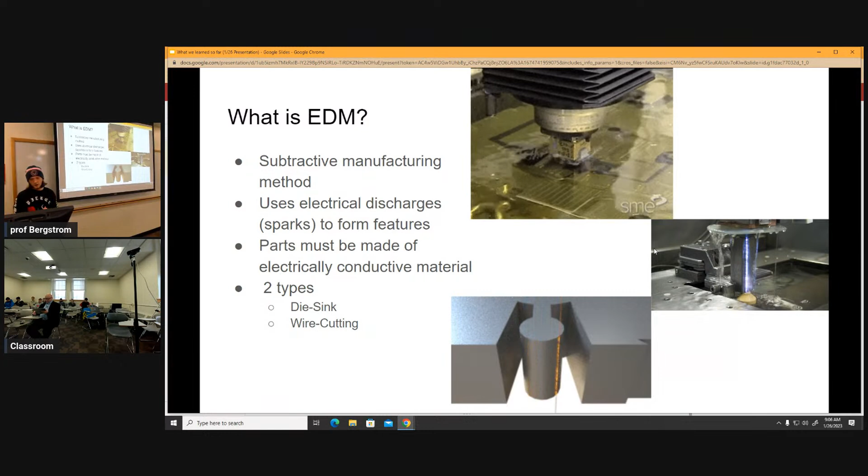And there's two types: there's die sink EDM and wire cutting EDM. Die sink is also known as conventional or sinker EDM, and it's done by removing material from the mold using a graphite electrode, and there's this dielectric fluid between the cathode and the workpiece, and it basically sparks as it's going over the piece, and it erodes the material as it's going by. Here's a little example of that.

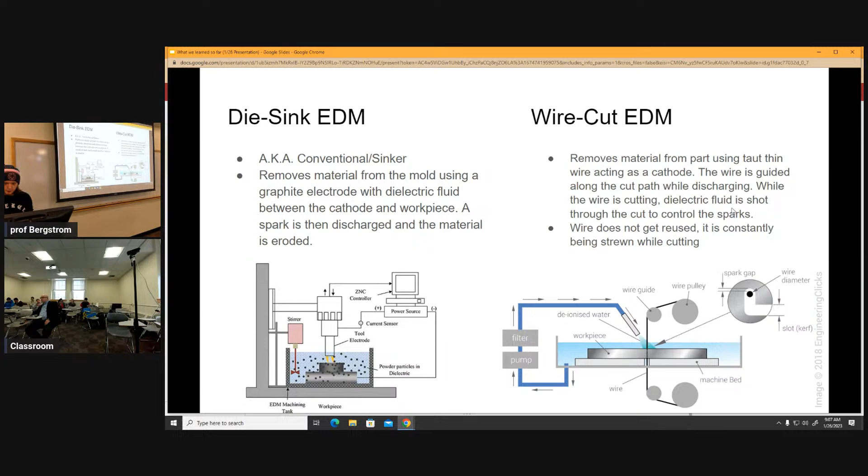And then wire cut EDM also removes the material using EDM, with a wire acting as a cathode, and it's this taut wire that, as you can see, goes up and down through the workpiece, and it's used to cut out the workpiece. The wire is guided along the cut path, and it cuts the piece. It also uses a dielectric fluid to keep these sparks extra precise, and the wire does not get reused.

All right, so I'm going to talk through a couple of pros and cons. Most of these are focused on wire EDM because that's where a lot of our actual machining is going to be for our actual part with the gear. But some pros is that you can cut pretty complex shapes or really small shapes. So part of cutting with a wire rather than conventional tooling is you're not dealing with having a tool with a radius or a specific way it cuts.

Presumably for a mill, you can't cut an inside sharp corner very easily because of the radius of the tool itself. Whereas with wire EDM, tiny tapered holes, gear teeth, hex bores, all those shapes we're capable of doing to a different level of precision, and tiny just because of the actual size of the cutting implement, the wire.

For us, the gear teeth are involute cut teeth, so it's a pretty complicated shape. Also cutting very hard materials - obviously they have to be conductive, as we mentioned, but we're going to be using steel. We're not going to have the same limitations for hardness that we would if trying to cut with an end mill. And maintaining very fine tolerances.

I have a GIF on the right that I think is kind of cool. If you look up examples of people using a wire EDM, there's a toy people make a lot where they do two complicated shapes that are really close to each other, so there's a nice running fit and they slide into each other. I think that's an illustrative example of how fine a tolerance you can get - two different parts can slip in smooth like butter.

Some actual cons: there's an inherent skill set needed for operation. We've already had a fairly steep learning curve just getting to the point of understanding what we're doing, safety, setting up CAM, etc. Because we're at a school, there are experts who work with these machines. But if you're using this in industry, bringing in a machinist who has only used conventional machining, there's still an inherent larger skill floor to get into.

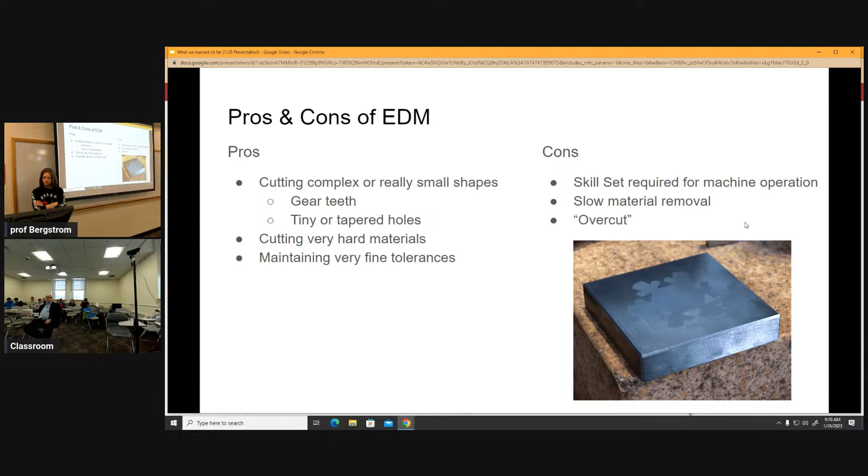Moving on to how EDM applies to our project: the machines we're using. We're going to start with the Haas mini mill, which most of us are familiar with or have used in ME1800. It has a pretty big travel distance, can hold a decent bit of weight, and cuts relatively quickly - you can see it moving pretty quickly when we've used it in the machine shop in Washburn.

The main purpose for using the mini mill is that we're going to be pre-cutting a hole so the EDM can then do the hex key in the center of our gear, and then we're going to be facing our stock so it looks good.

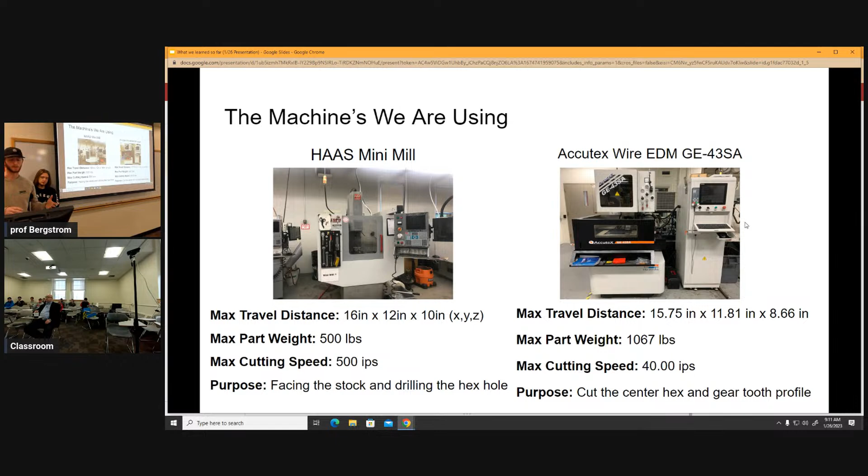Moving on to the actual EDM, as Justin and Sam mentioned earlier, we are really using the wire EDM, and it has lots of benefits, such as precision. It has about the same travel distance as our Haas mini mills and can hold a lot more weight, but as Sam mentioned, it moves at a much slower rate - around 40 inches per second as opposed to 500 inches per second on the mini mill. We're using our wire EDM to cut the center hex and our complex tooth profile to make sure we get that nice, precise cut.

There are 4 operations you're going to do. First, you want to face the surface, using either a mini mill, VMC, or whichever mill you want. Use a face mill to do both the top and bottom face so you have a nice surface finish and the right start distance, which should be 1/4 inch.

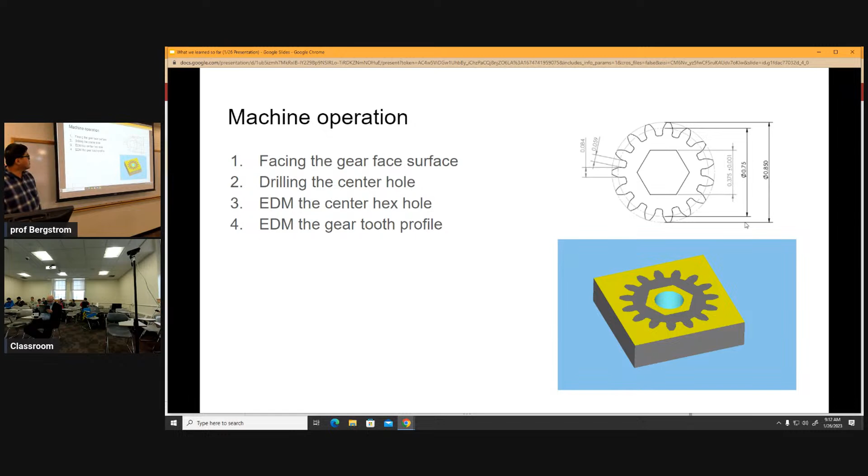Then you want to drill the center hole where the hex is. The EDM can cut the hex, but it cannot do the hole, so you need to drill the hole for the EDM before you put it in the machine. I set the hole to be 1/4 inch, but if you want to change it smaller that's fine. Then we use the EDM to do the inside of the hex, then switch to do the outside and cut the gear path. I'm not going to go into the mill process in this project since it should be quite simple.

So how do you use Esprit to do this EDM thing? First, you want to have your part and your stock imported into Esprit. There's also an Esprit template that will be provided for you. The one thing you need to make sure of is that the part and stock are sitting at the corner, not the center, as the origin. I made the bottom left the origin of the operation.

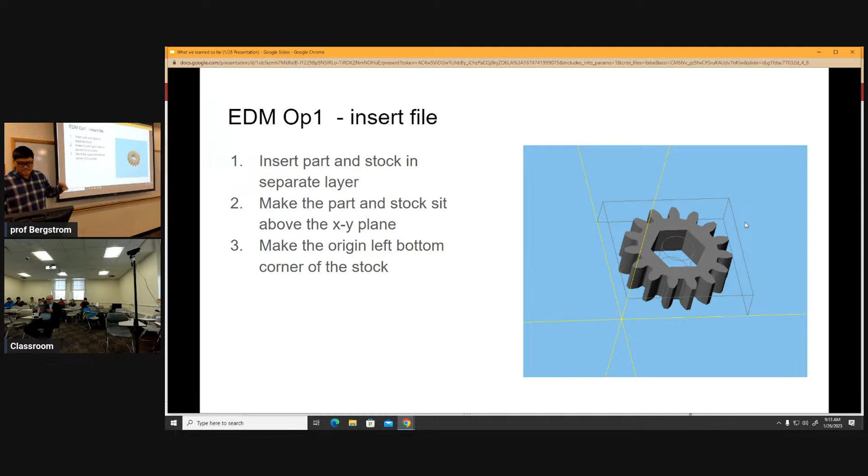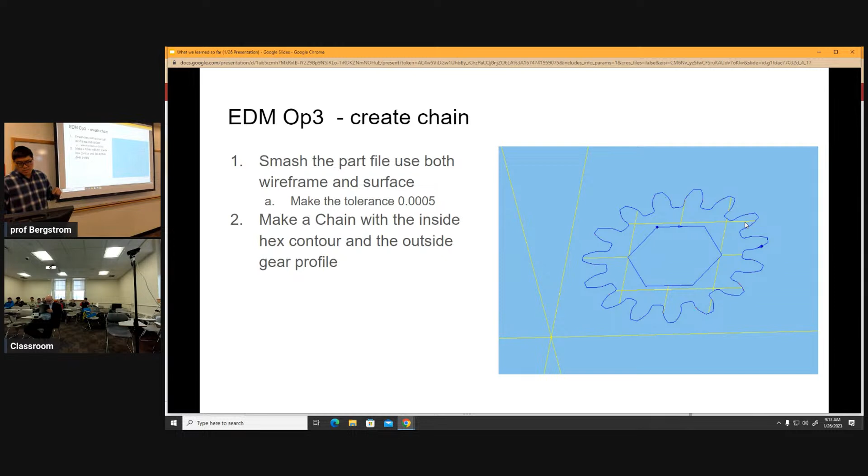Then you want to create a chain. You want to smash the part in Esprit, then make the tolerance about half of what we used to use. Then you make the chain of the inside and outside features on the XY plane.

Then you want to select the chain, then select solid wire gold, solid wire platinum in the Esprit section. You select contouring, then you need to set all the distances: upper wire guide, workpiece thickness, reference plane, lower wire guide. Since you're using wire EDM, you have two things that hold the wire, so you need to set what the upper holder is and the lower holder is. The machine also needs to know where your XY plane is, since that's where you do the operation, and how thick the workpiece is so it can touch your workpiece correctly.

One thing you need to know is that the outside profile is a punch and the inside is a die. That's just something to select in Esprit, otherwise it comes out wrong. Then in cut data, you need to select strategy and set E-pack to 1011, and set register to 1. In this setting, it's kind of like a laser cutter—you select how much power is going through and how many tool paths you're going to do.

In EDM, you can have a rough and a skim pass. The rough cut is just to cut the shape, while the skim is like a finishing cut to get a good surface finish. Then you need to set up the startup distance so you don't want the wire to be sparking—if the wire touches the piece and sparks, that grounds your wire and it doesn't work. You want the spark to happen before you enter wherever you want to cut. You also need to set the entrance and exit position so the wire knows when it's starting to do its wire EDM thing. That's it.

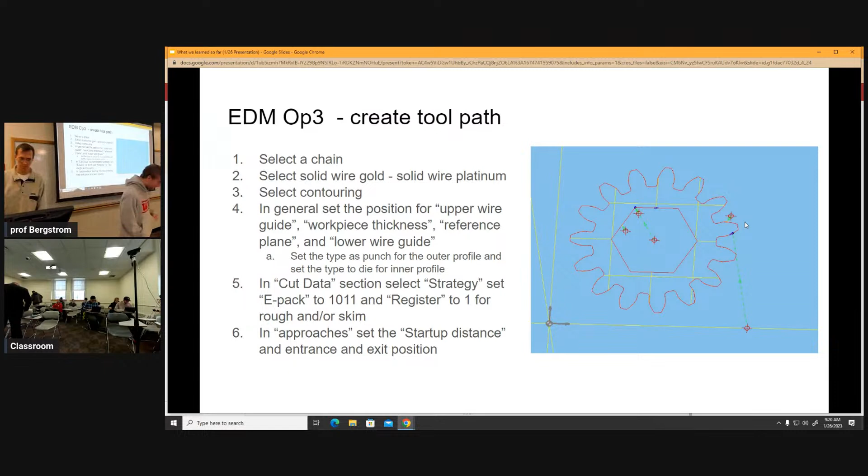You were several minutes into that presentation before I realized I was still listening to it also on YouTube with about a 4-second delay. It took me a few minutes to have that click in my mind. Go ahead, full screen.

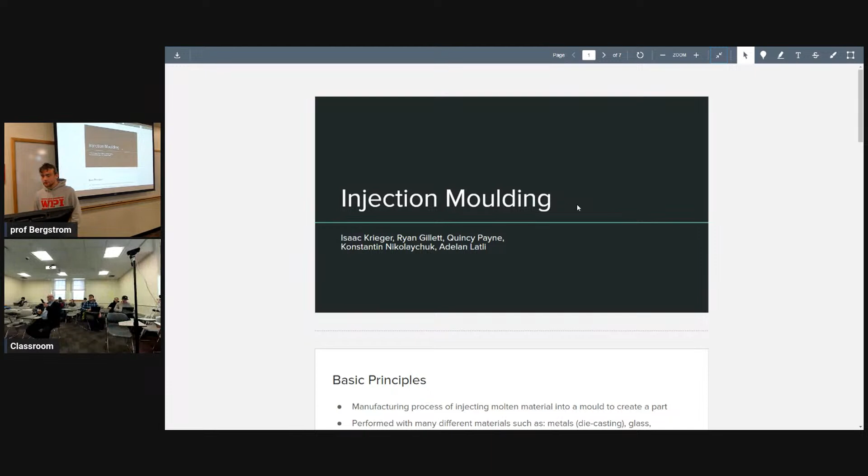So we had injection molding. We didn't get too much in the way of finding out what we needed for our machine because it was locked behind the door in Unity, but we did go and visit—you found it? We did find it, yes.

So what is injection molding? Injection molding is basically taking melted plastic and forcing it into a mold, where the plastic expands into the mold. You let it cool, take the mold apart, then you have your part. Some advantages: you can make pretty small, intricate parts, but it has difficulty with really small features and sharp corners. With more rounded parts, it has an easier time. You can also make parts pretty fast with injection molding, but it's not the most accurate way of making parts.

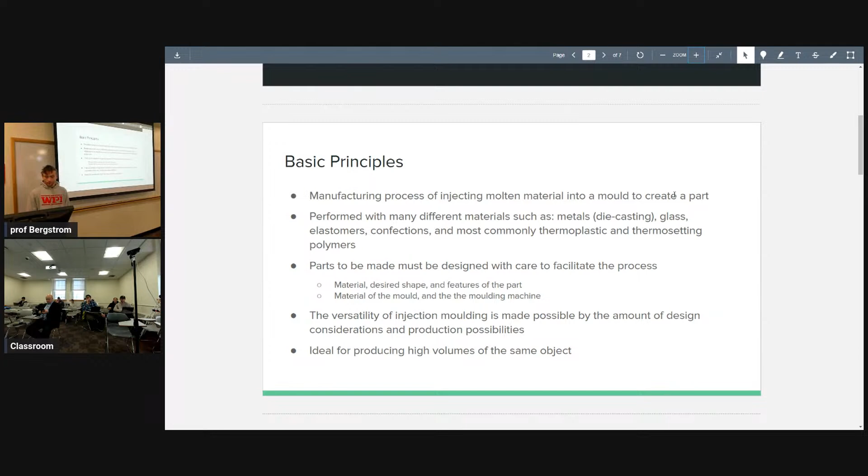When you're designing the mold for your part, you need to keep in mind a lot of different considerations—the material you want to use, and the shape and features of the part.

In a basic injection molding mold, there's different parts that are required. So you have the basic mold. We printed out an example mold if we want to pass it around. You need the mold itself, which is the light gray part, and the blue is the actual plastic part that you will be injecting the plastic into to make.

You need to make sure that there's a hole in the top for your sprue, which will let the molten plastic in, gates to let the plastic into the parts, and then to remove the part from the mold, you need ejector pins. So if you look on the bottom of the bigger mold, there's 2 or 4 tiny holes. Those are for the ejector pins.

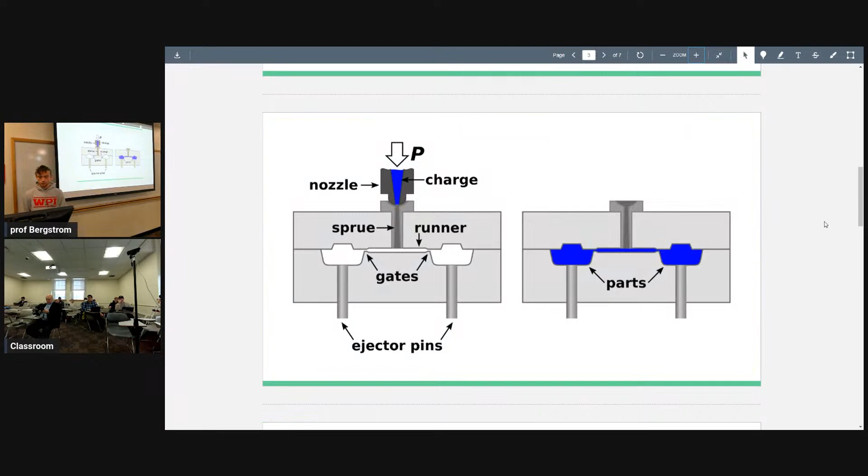When we did some more research, we realized that this would take up a lot more material than necessary, and it had a lot of sharper corners near the edges that might be difficult for the injection molding to fill. So we then redesigned it the way that you can see in our 3D printed part, just a rounded design like that. So it'd be a lot easier for the injection molding to fill it, it wouldn't use as much material, and then we can print both of them at once.

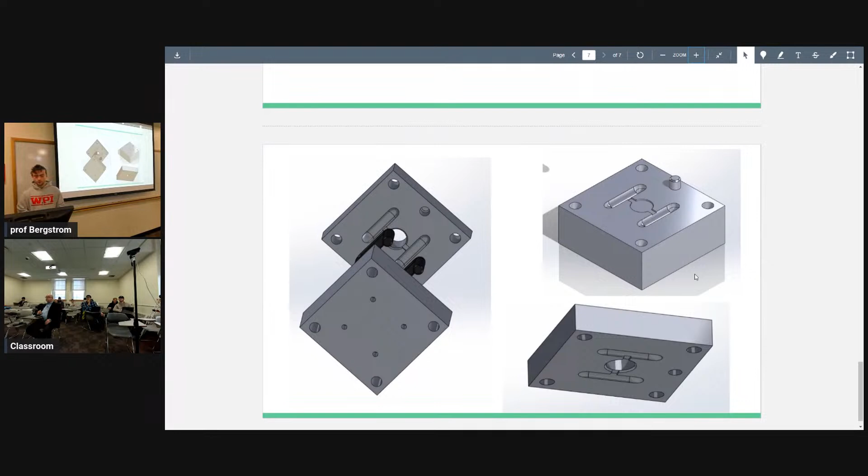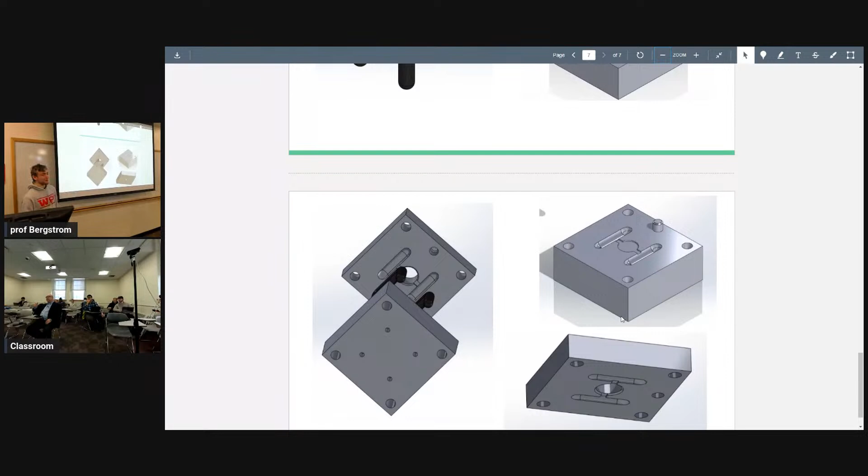So are you guys expecting 4 holes for those feet to be inserted into? Yeah. We also weren't sure what your design was. Okay. I think it'd be hard to balance on 2 feet. I think you're gonna need at least a 3rd hole. Yeah. So ours right now uses 4 holes and has 2 feet. This is why we have an early design meeting, so that the different design groups can talk to each other and work those kinks out.

So I have a few questions. So you've got 2 pieces that are identical, and you're just making 2 at once with 1 shot, right? Yeah. And I think you put 2 holes at either end or something. We want to put like 10 or something just so we can print out a bunch.

A few questions. What's your material? We're not sure yet because we haven't gotten in contact yet with the person that actually made those. I can answer that question. There's a pallet with injection molding plastic beads that's on the floor in Washburn 108. That's your material. I don't know what it is, but you can go read the label. Okay, so we've got to figure that out.

What's your tolerance? Because you're gonna fit into their part. We haven't yet figured out exactly how good the tolerancing is on this particular machine because we haven't gotten to actually interact with it or know much about it yet. We don't even know the model, so we've got to figure that out. But we're planning on making the part about a 1/4 inch. Partially because we're rounding the top of these, we're hoping we'll be able to pressure fit it into their holes. Make theirs slightly smaller, so we'll be able to use a hammer or something like that to pressure fit it in.

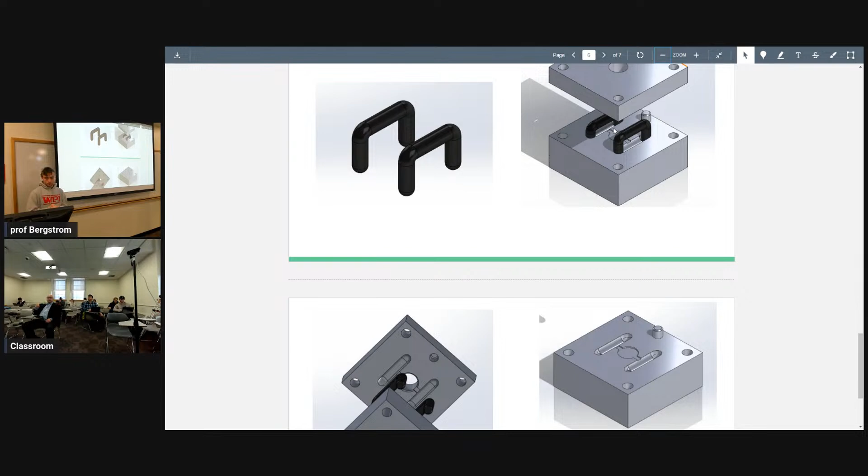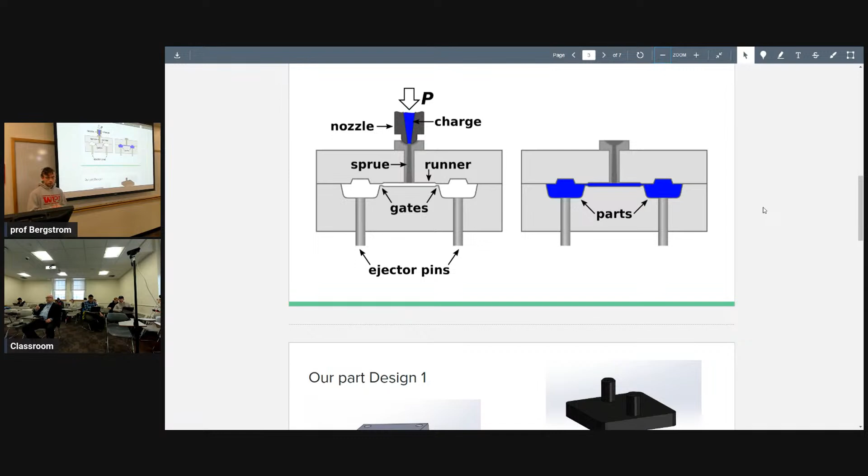So for your gate design, did you do some research on that, or how did you come up with the parameters you picked just to start with? This is just kind of a rough idea. I based it off of this kind of side thing. And I've had experience with rubber molds, where you put those in a centrifuge and pour molten metal into that. So it's from my experience with that. Okay. But yeah, we'll probably have to fix this in the future a little bit.

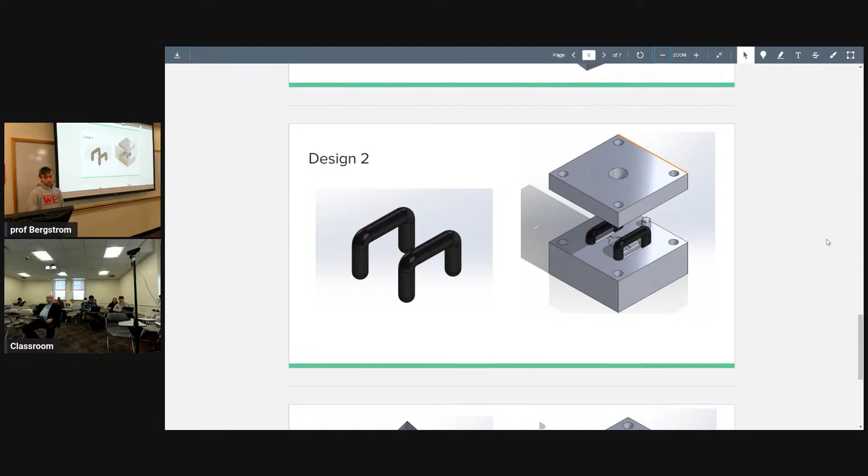You mentioned ejector pins to remove the part. Have you guys taken into consideration any of the draft that you might need to get the part out? No. Anybody else?

So I just don't know how an injection molding machine works. Would the metal parts get really hot? And would that be a safety concern, like if you touch it you burn yourself? Probably a little bit. You put it in the vise underneath the plastic injector, pull the lever, probably let it sit for a little bit, and you can take it out.

So in production molding machines, they get very hot, so there are safety concerns there. You also have to cool the plastic enough to take it out. So they'll have cooling lines in them and stuff like that to pull the heat out, because the faster you can cool it, the faster you can make a new part. Yeah. Not as critical in our application.

What's the height? The mold itself, I think, is 1.5 inches or 2 inches together, and the part itself is 1 inch wide from center point to center point, and I think it's 0.75 inches tall. But that can be changed very easily. I just put a random number in there because I still didn't know what your design was. Yeah. Anybody else?

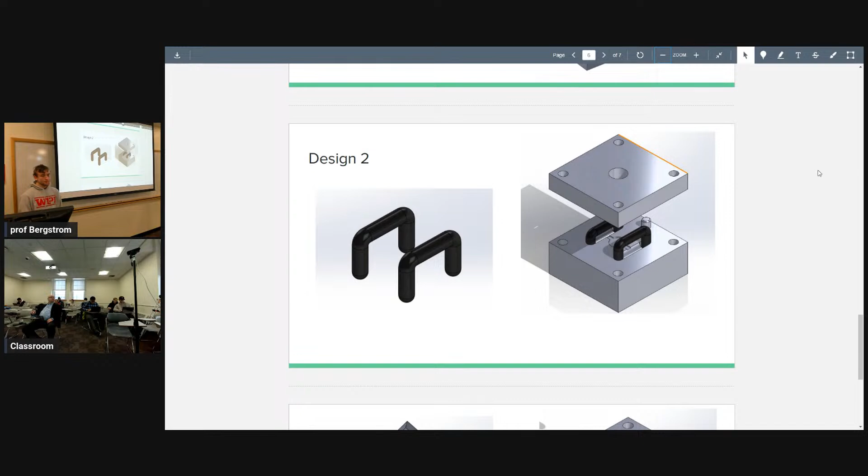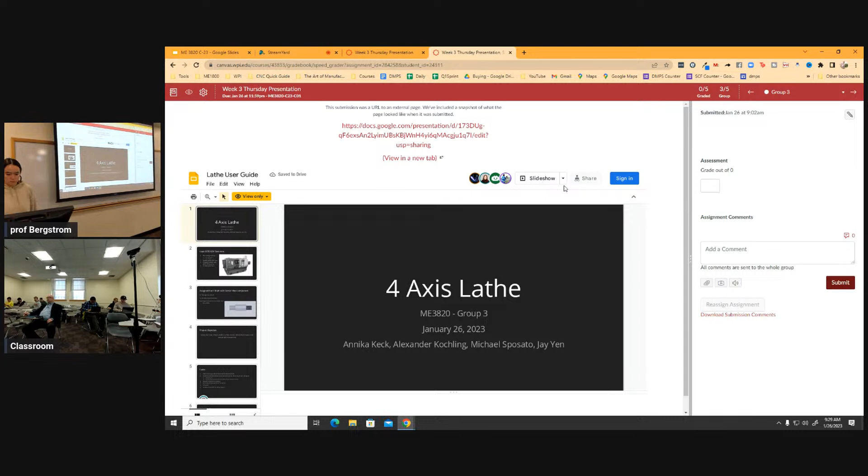All right, group 3. Just in a... You didn't even have one. Okay. There's nothing there yet.

So yeah, our project, group 3, was to research the 4-axis lathe and using that part. So just an overview of the 4-axis lathe that's in Washburn. It is the Haas ST30 SSY. It is giant, probably almost from here to the door, full length, and a lot bigger than we really expected. The max cutting capacity is a 16-inch diameter and a 23-inch length.

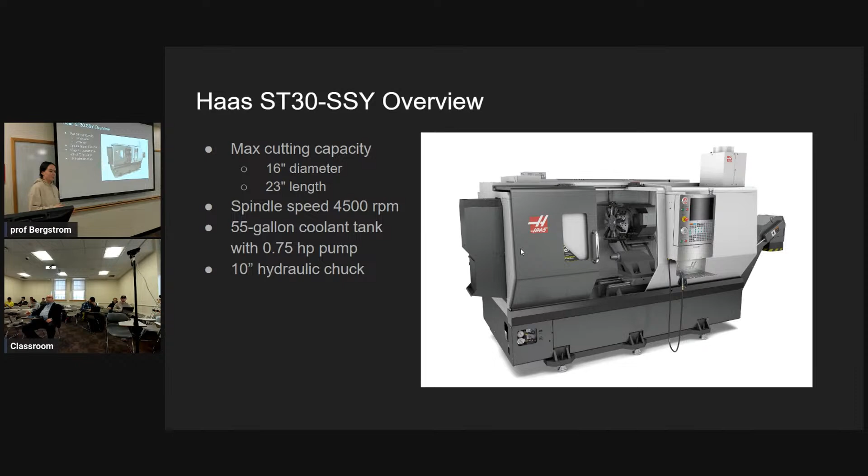The spindle speed can go up to 4,500 RPM. The coolant tank is a 55-gallon tank that has a 0.75 horsepower pump, and it has a 10-inch hydraulic chuck. So just some basic information. There are a lot more listed parameters on the model, but these are the most relevant for us in the project, as we are just machining a fairly simple part.

So the part itself, what we were given last class, we still have to figure out the left side, the end dimension of that, based on the bearing that we have. And then the center part, that hex piece that'll fit into both gears, is 3/8 of an inch around. And the other side of that is a 1/4-20 thread on one end. So relatively simple, but that's our preliminary CAD model before we finalize some of the dimensions.

We didn't talk about this before. We plan on cutting it out of 1-inch diameter stock. Okay. So that'll be a lot of material removal, but it's the smallest stock that we can conveniently use with that chuck. Okay. Good to know.

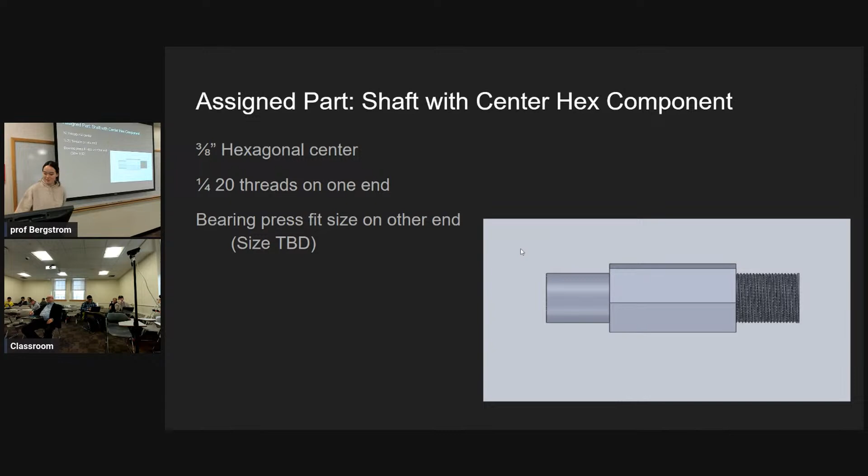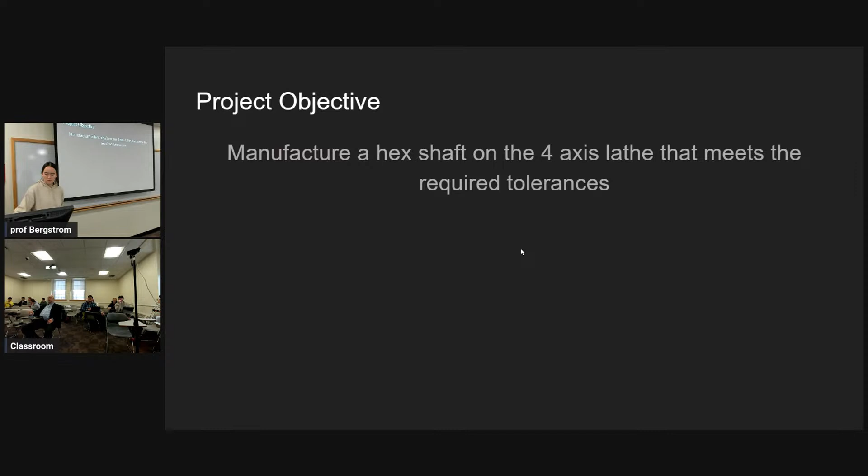So our project objective is to manufacture a hex shaft on the 4-axis lathe that meets the required tolerance. We don't know which tolerances yet. The tasks we have to complete are: determine the part dimensions and create the sketch, confirm part dimensions, make sure it works with the other teams' designs, get the stock, tooling and parameters, create the part, and lastly create the tutorial for the other teams to follow.

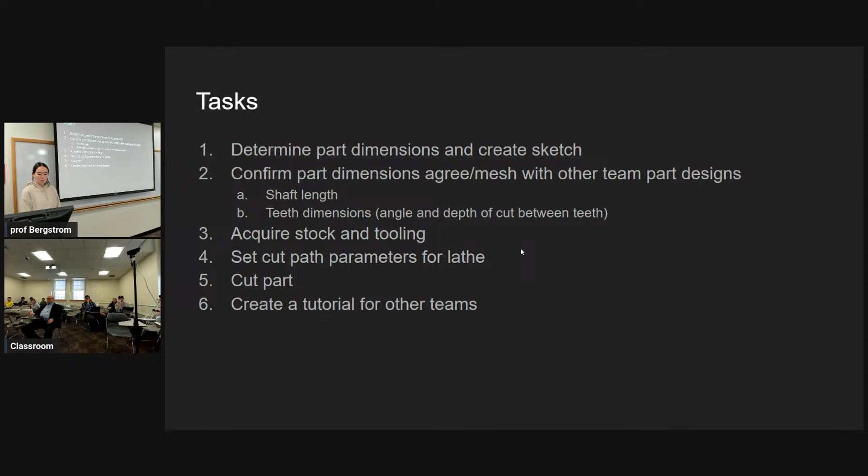And so for our current project progress, we have, well, that was when I wrote that a couple days ago, so that's not correct anymore. So we now have received the CAD design. With exact dimensions, we're still figuring that out. But yeah, mock-up has been created, like this is now.

Obviously, the part has not yet been machined, and we do not yet have a program for this part creation, so probably going to need some assistance in coding the cut path parameters, because I think all of us are a little rusty when it comes to lathe operation. Yeah, I think we should set a time to meet and work on that together.

Today's Thursday, right? Yeah. I think I can actually be free most of tomorrow morning. I'm just double checking. So I'm free after 10 o'clock tomorrow morning until, well, I could figure out to be free all day. If somebody's got an appointment with me, it's 15 minutes, so we can take a break.

So if some combination of you can meet with me tomorrow morning, we can go through some setup steps on the lathe and go through the programming that you're going to need to do for the mill turn.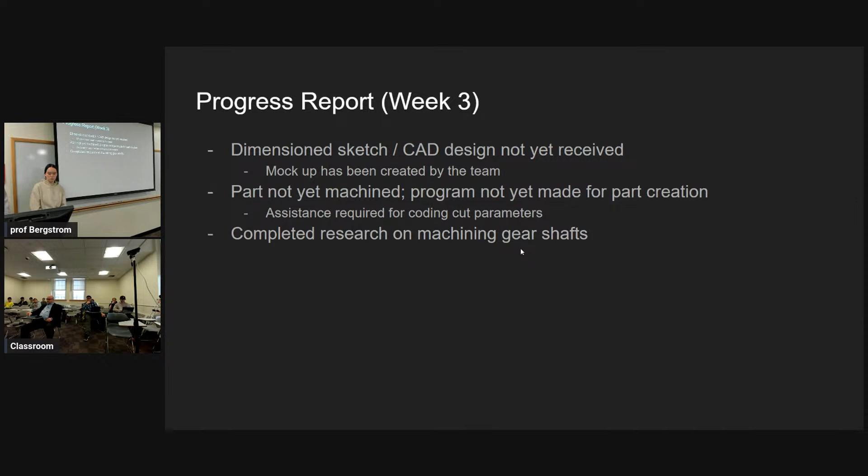And lastly, we completed some research on how we machine gear shafts. I incorrectly assumed that this would be closer to an actual gear teeth rather than just a regular hexagonal one. So I looked up gear hobbing, as in how gears are cut. And the hob is a type of cutting tool that they use to cut the teeth, mostly in cylindrical pieces, so it is a separate lathe attachment. And those hobs can come in straight or spiral shapes.

And the main difference is that straight hobs are like a cylinder with multiple completely perpendicular transverse rings of cutter teeth, and they have to be moved in and out individually to cut the teeth. So it's a slower process. Whereas spiral or helical hobs consist of teeth wrapped around that cylindrical shaft, and those can be moved in and out continuously while spinning at the same time as the actual gear that you're making. So it's a faster process.

And then as for shaft threading, you would have to worry about partial or full profile inserts to be able to cut the thread groove, either without or with topping and cresting those threads respectively. And then there are multiple in-feed pass methods to form those threads, being radial, flank, modified flank, and alternating flank. And radial is simply where you put in the tool exactly perpendicular to the workpiece, which is probably the least recommended method, considering the lower quality of the thread you'll be forming.

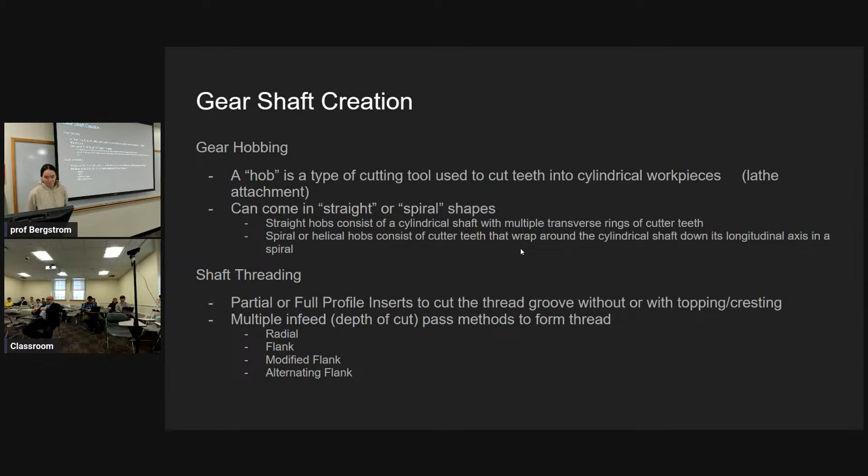All right. This is group 3, right? This is group 4. Yeah, that's a good question. Yeah, do an assessment for your group too. Okay. Isn't there like a separate assignment? Yeah, but there's... We also had a group 5 assignment, but just skip group 5. We had the possibility of having 5 groups, but we went with 4.

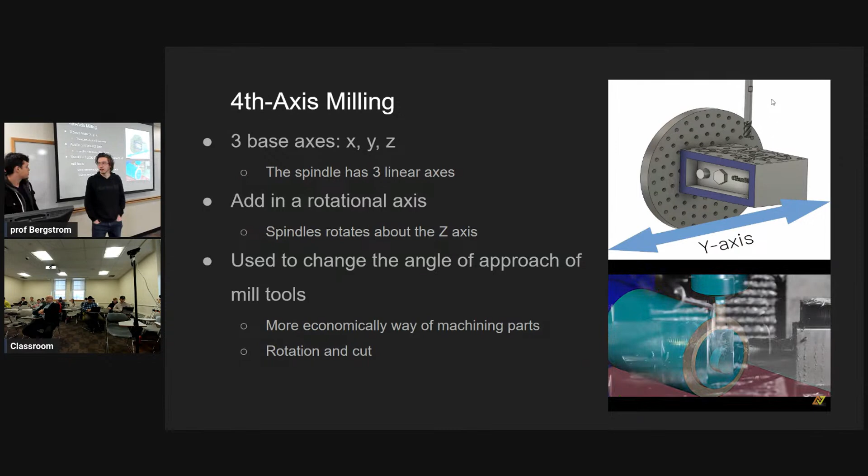Hi everyone. We're the 4th Axis Milling Group. What is 4-axis milling? Before I start explaining the 4-axis, I want to explain the 3 regular base axes: the spindle has 3 linear axes, X, Y, and Z, as you see in the animation. When does the 4th axis happen? When you add in a rotational axis, which is the A-axis, as you see in the animation.

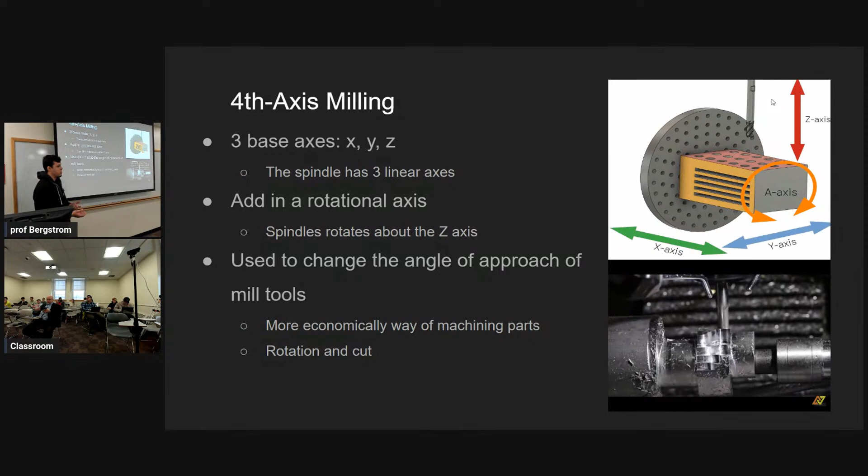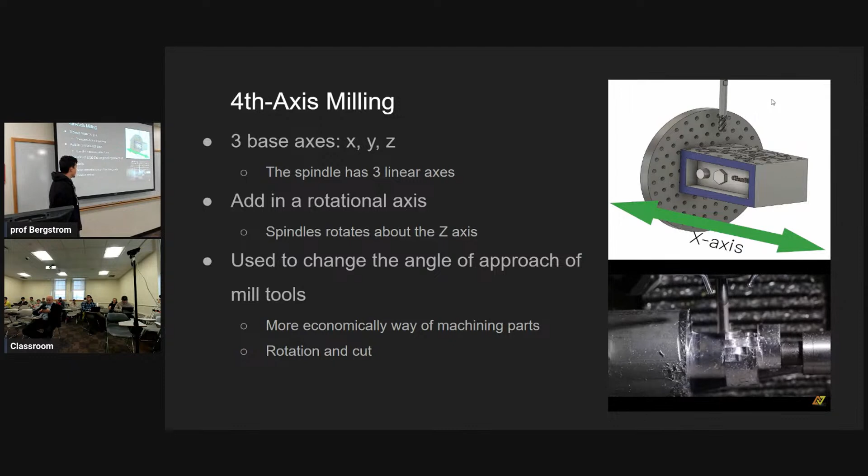That gives rotational movement to the workpiece, giving the ability to rotate about the axis. Is this useful? Yes, it is, because this A-axis gives you a new angle of approach for the mill tools, and it's a more economical way of machining parts. Instead of needing to buy two different fixtures, you actually buy one. You're saving money and time because you are cutting and rotating at the same time. So these four axes give you a reduction in cost and also time.

But... So next, oh no!

So this is our rough plan for how we're going to start making our part. Rodrigo is sort of our expert in terms of how to actually make the fourth axis work. We talked to him yesterday for a little bit, and we set up a more substantial appointment tomorrow. He said he himself isn't exactly sure what state the fourth axis of the mill is in at the moment. So we're going to go in as a group, see what exactly is going on, get the important details on how to work it, the sizings that we can use and all that stuff.

Then we're going to work on a fixture plate, which essentially would mean attaching all of the important tools like the live center and the fourth axis to a plate that can easily be inserted and then removed from the machine.

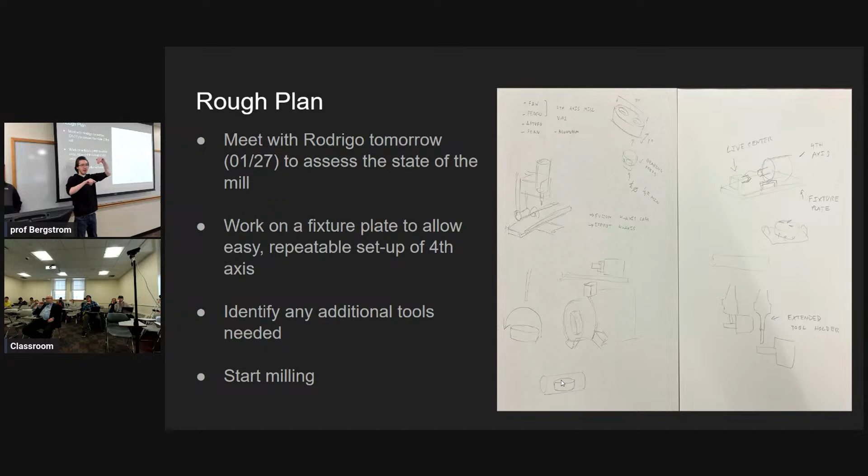It's hard to see the drawing even though they step back. Essentially you have the stop. This is basically starting right now, away from the stop. This is sort of the animation. So you have a long piece coming out, and you essentially have your cutting tool coming in as the piece is rotating. It's essentially similar to a lathe. You put the tool in and you rotate it, and it cuts as it rotates. Yeah, there's a similar video there.

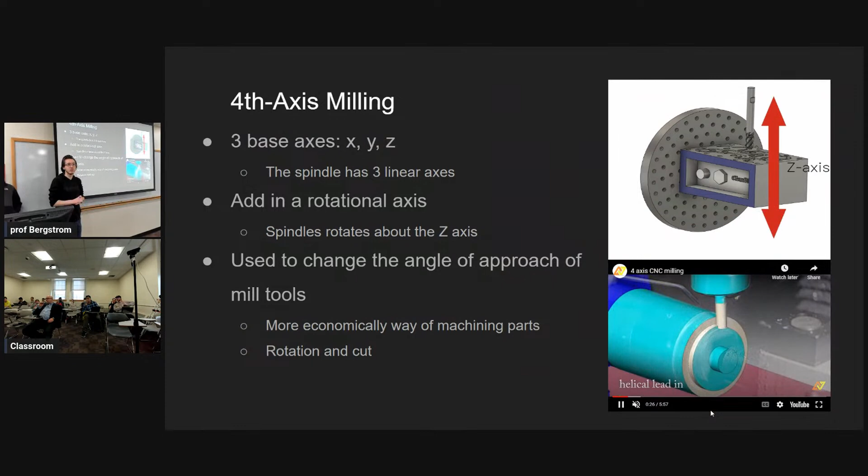I was asking about the top operation. Right. Well, in the design those are flat faces, so those are pretty quick. So with this part, what orientation is it going to be? Where are the jaws going to hold this piece? Just stand next to it and show me. So the jaws are essentially coming in on the sides like that. So you can essentially do it that way. Okay.

Okay. Yeah, so you're still working on that, and you're going to change the design to incorporate feet at both ends anyway. Okay. Yep. So if somebody can come by when I'm meeting with them tomorrow, I can give you a handful of bearings and we can work on that. We'll do all that at the same time.

The spacing between your two bearing holes, how do you know? But it depends on how far the gears need to be apart from each other. So you don't know that number without interacting with the people that are making the gears and know what the circle is. So you should interact with group one to figure out what that spacing needs to be based on the gears that they're making and how far apart they need to be from each other. Any other questions?

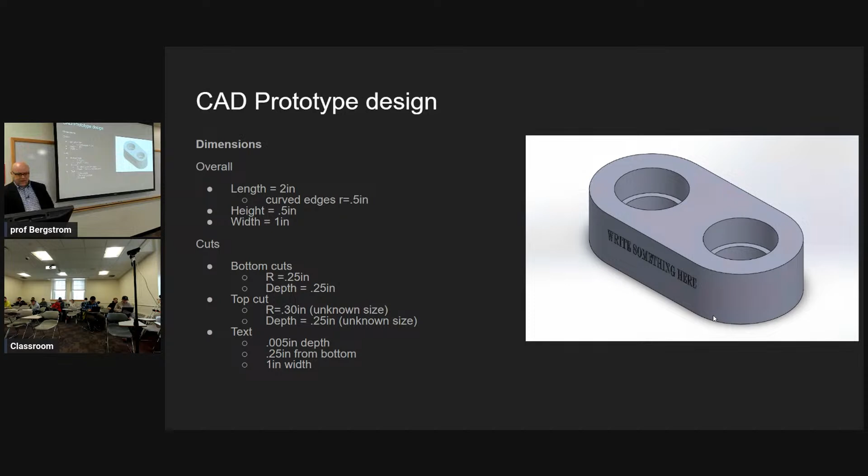And I do think that one of the best things WPI does is prepare engineers to also be able to talk to each other. And sometimes even talk to non-engineers. Kind of cool. And so on that topic, I have some general feedback for everybody. And then I'll give each group some specific feedback on Canvas and everything. But when I was a WPI student, it was really the first time that I ever was in a position where I was doing presentations and stuff just like this, right? Yep.

We could. So I'm in several Slack chats, and I'm not very adept at it. I find that I only get alerts when messages come in if it's the last one that I had opened on my device. So with that knowledge, I don't think it would be horrible to do it. But if you need me to respond to something, send me a text that says go look at the Slack or something like that, right? I'm not very good at Slack. I keep one of them open most of the time, so I'm only getting notices from that one. But yeah, that could be a thing if you guys want to do that.

Or just, there's an email alias for each group, right? Is there any group that has not created an email alias? Okay, so I'll reply all to all the email aliases and pass those around, or I'll make a list. So if you want to talk to group one or something, you can just email that alias and get the response back. It's probably simpler than creating a Slack.